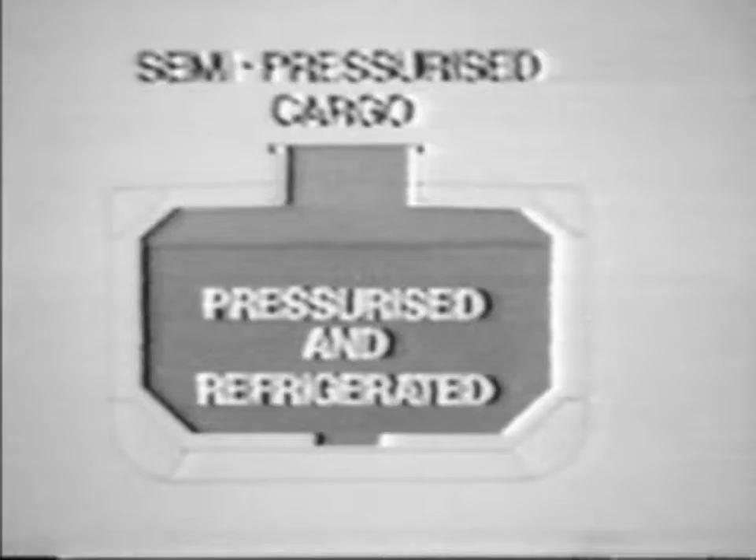Here are the boiling points of the more common cargoes given at the standard pressure of 1 bar.

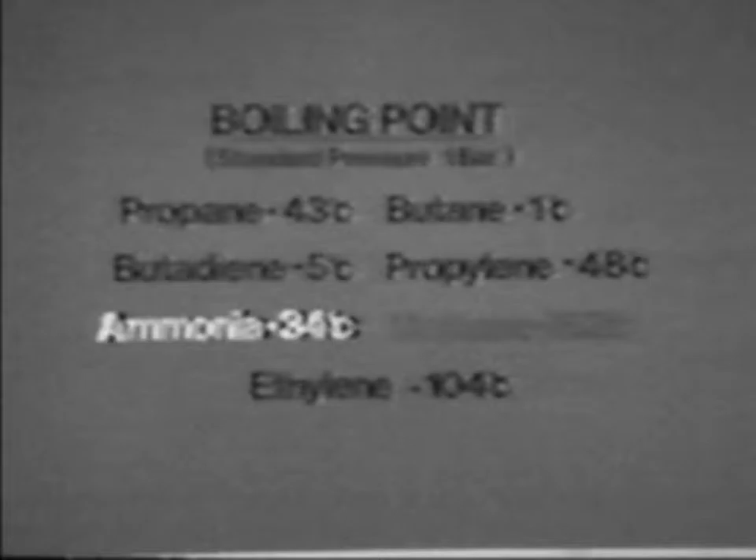It's not always sufficient to think of the cargo in pure liquid or gas form. It must be remembered that during vaporization, vapor will carry varying degrees of moisture content. Excessive vaporization causes expansion and venting and increases the need for reliquefaction.

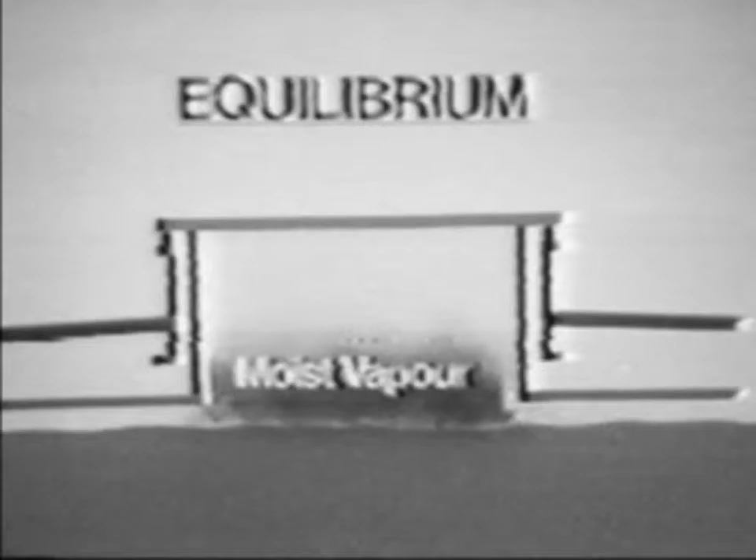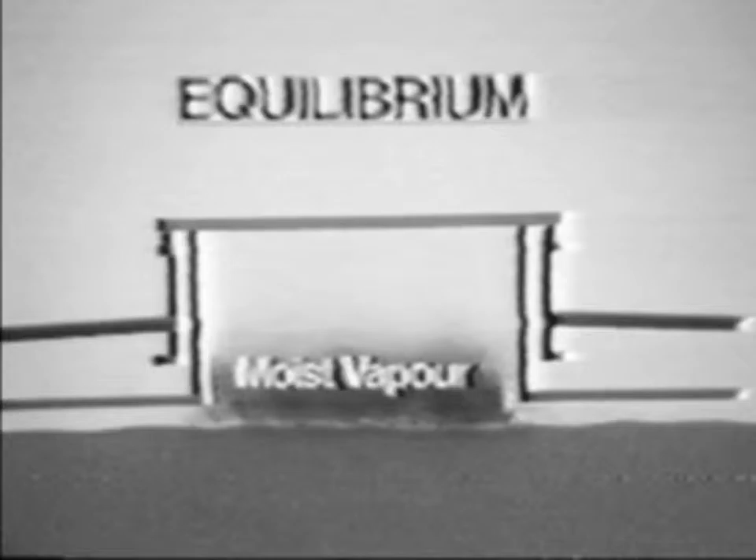Under certain conditions of temperature and pressure, a state of equilibrium will be reached, and such vapor will cease to vaporize to its full gaseous state. To carry our cargo successfully, we must reduce vaporization to a minimum, and thus the relationship between pressure and temperature is a critical factor.

Just to recap, it's the combination of these factors which maintains the equilibrium of the cargo. The three factors are: 1, the gas itself; 2, the pressure at which it's carried. Increased pressure reduces vaporization. And 3, the temperature at which it's carried. Reduced temperature reduces vaporization.

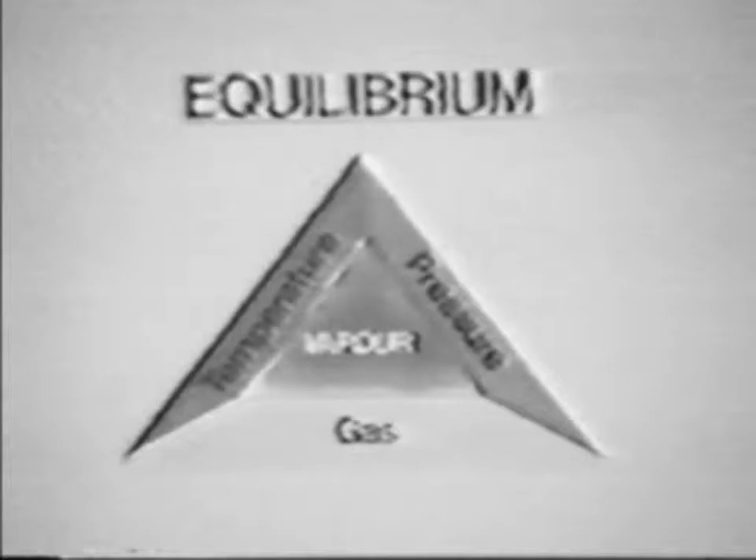The suitability of a ship to carry a particular cargo will depend, of course, upon the refrigeration and pressurization plant available. They must be able to achieve the required performance levels. To assess in broad terms whether a ship is capable of carrying a particular cargo is a relatively simple matter, with the aid of a vapor temperature and pressure chart.

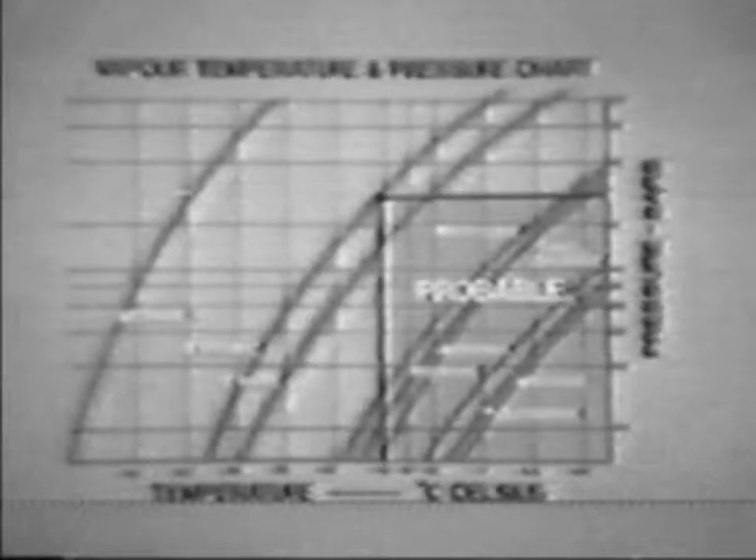Knowing the maximum carriage pressure and minimum carriage temperature for the ship, select the point at which these two coordinates meet. Gases whose curves lie to the right and below the point can probably be carried. Those whose curves lie to the left and above the point cannot be carried.

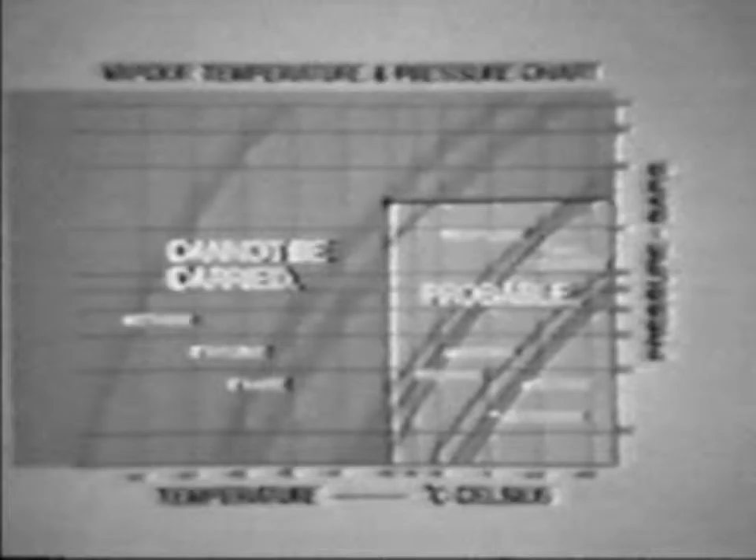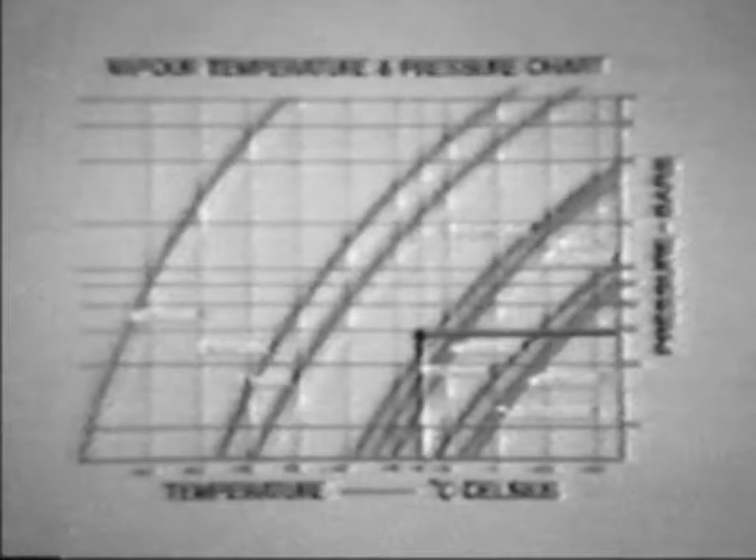Just to clarify the point, here's another example. In this case, the ship's maximum operation is minus 30 degrees centigrade at a pressure of 2.8 bars. Inspection of the graph shows that she could probably carry butane, butadiene, vinyl chloride, ammonia, propane and propylene. She could not carry ethane, ethylene

and methane. There are, of course, other physical properties that must be considered when handling gas cargoes. For instance, what about relative density and specific gravity? Well, we need to consider them both. Firstly, relative density, or as it's sometimes known, vapor density.

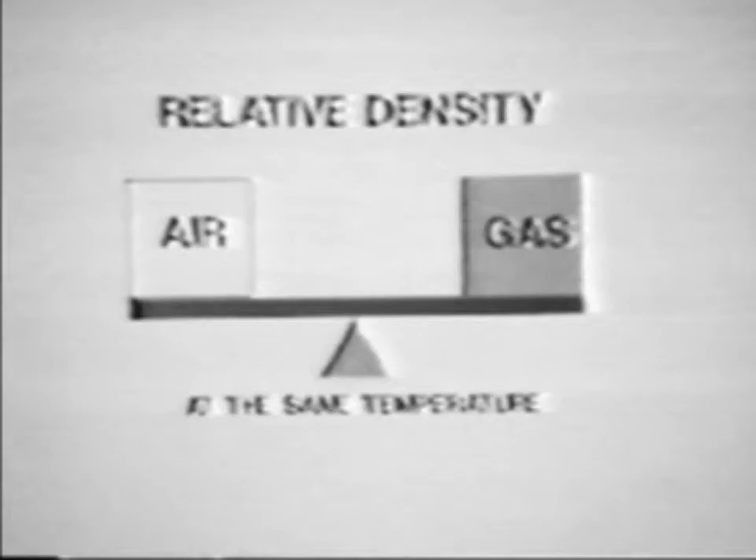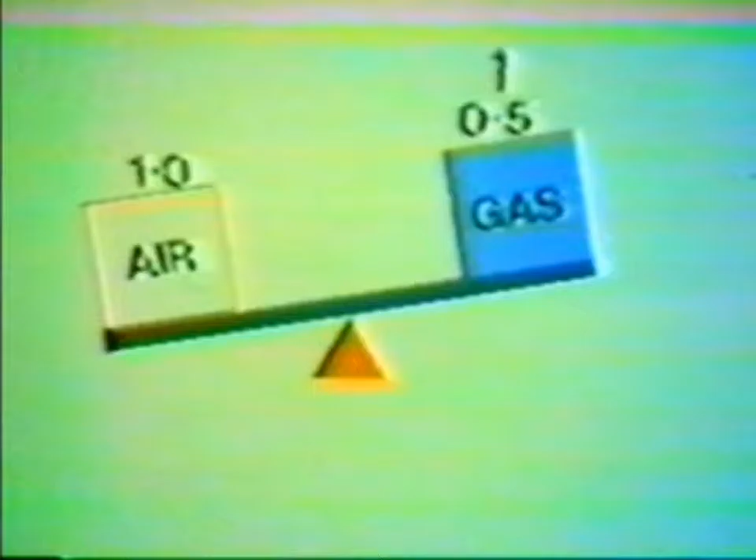To refresh your memory, relative density is the relationship between the weight of a gas when in a vapor state compared with the weight of an equal volume of air at the same temperature. If it is lighter and its density is less than 1, it rises. If it is heavier, with a density greater than 1, it falls.

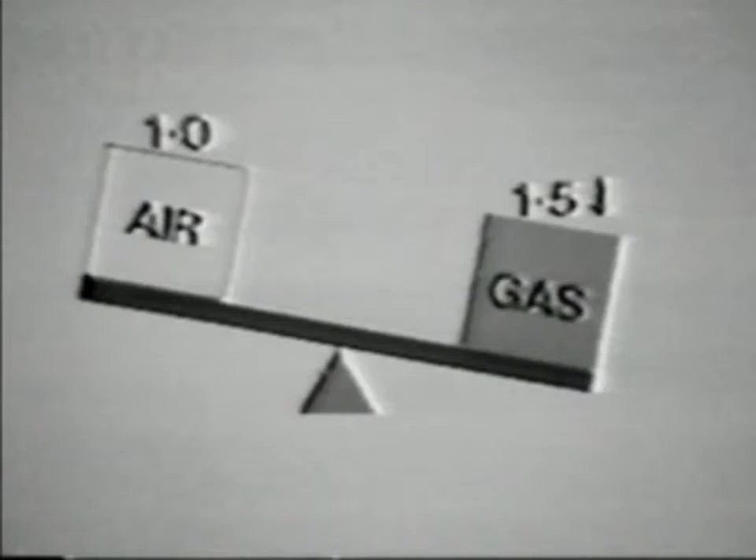This property is particularly important when we consider whether a dangerous gas concentration could develop. For instance, when venting, if the relative density of the gas is greater than 1, it will tend to sink to deck level. This is why the vent pipes are so high, to allow the vapor to be blown away before it reaches deck level.

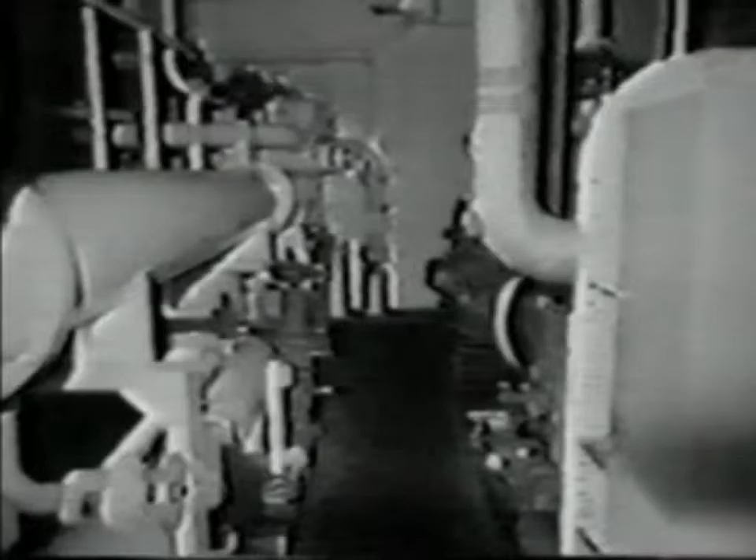Similarly, it's of importance to know how it would behave, say, if there were a leak in a compartment such as the reliquefaction room. Would it occupy upper or lower spaces? Here are the relative densities of some of the gases at the reference temperature of plus 20 degrees centigrade. It should be remembered that as gases are heated, they become lighter, and heavier if cooled.

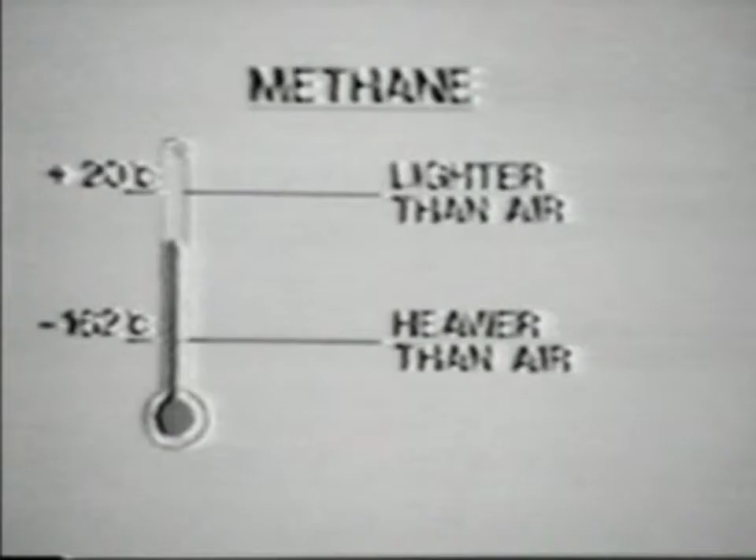For instance, methane, or natural gas, is heavier than air at its boiling point of minus 162 degrees centigrade, whereas at plus 20 degrees centigrade it is lighter than air. This means that if methane were vented to the atmosphere at its boiling point temperature of minus 162 degrees centigrade, it would sink. Then, upon exposure to atmosphere, it would heat up and rise as its relative density decreases.

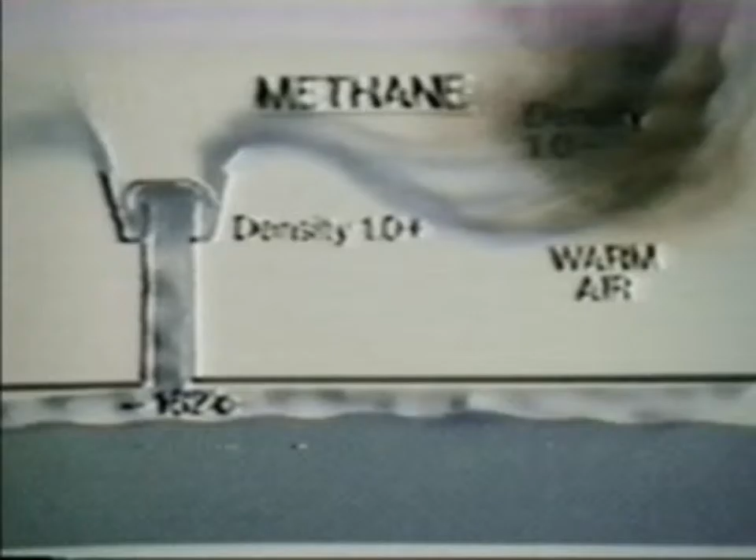Specific gravity is similar in some respects to relative density. It concerns the mass relationship between a solid or liquid compared with water. In other words, specific gravity is the ratio of the weight of gas in its liquid form relative to the weight of an equal volume of water at the same temperature.

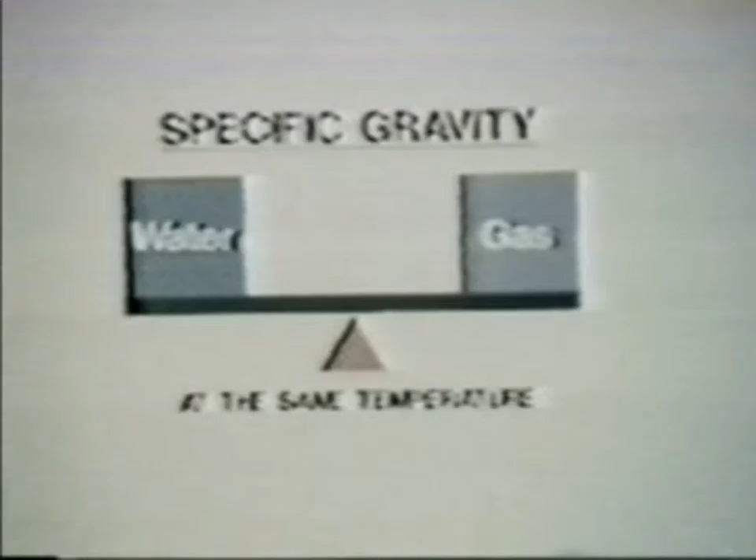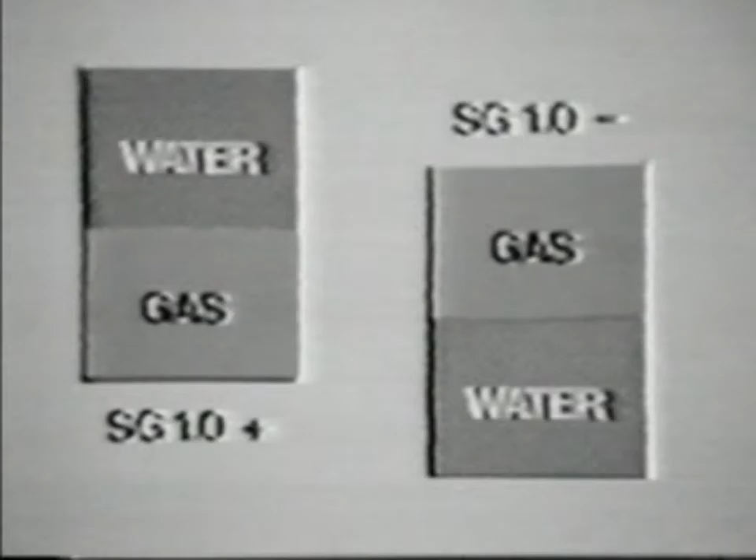Providing the liquid is insoluble in water, then a liquid with a specific gravity greater than 1 would sink, and if less than 1, it would float. This, of course, is only true if the gas remains in its liquid state. In the event of any spillage, vaporization quickly takes place, and so the relative density and not the specific gravity of the gas becomes our major concern.

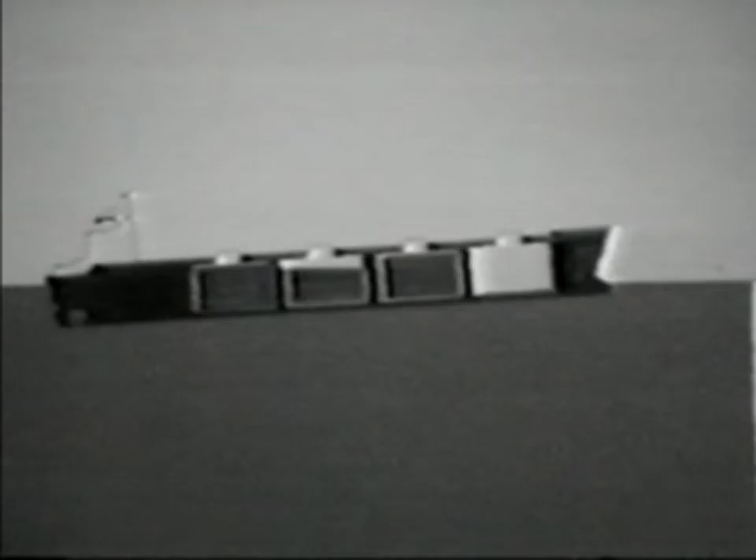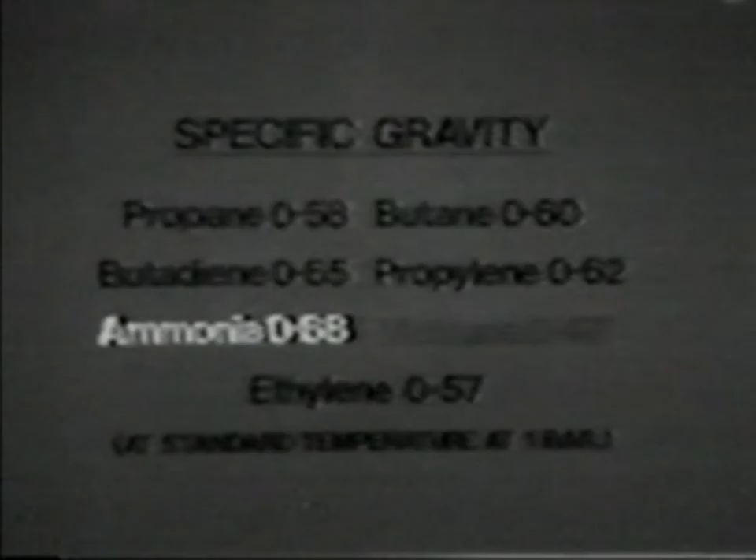Our interest in the specific gravity of the cargo lies in its use in cargo capacity and stability calculations, as its weight is proportional to its specific gravity. Here are some of the specific gravities of